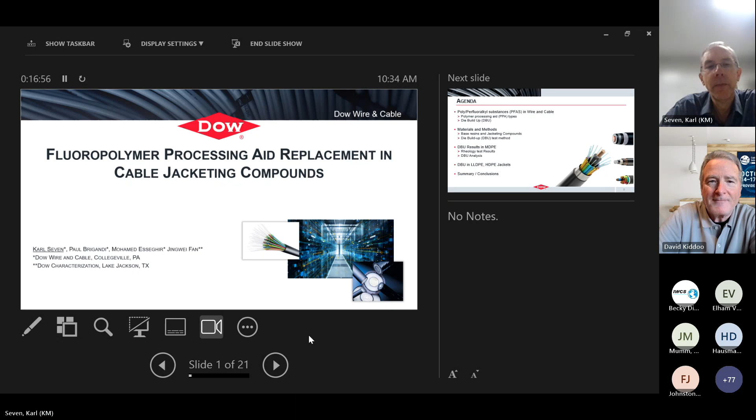Okay, can you hear me okay? Yes, absolutely. Okay, so I'll get started here.

I'm just going to describe on a high level here what I'll cover in this presentation. Basically, the first part focuses on poly and perfluoroalkyl substances, in particular in the context of fluoropolymer-based processing aids, so it's very focused on that area. I will get into what the motivation is behind why it's a good idea to avoid these types of processing aids, and what other options can be used to replace them potentially. Most of this presentation will focus on die buildup results, in particular for medium density jacketing compounds. I will branch out the results also to linear low as well as high density polyethylene jackets, and then I'll provide some of the key conclusions from this work.

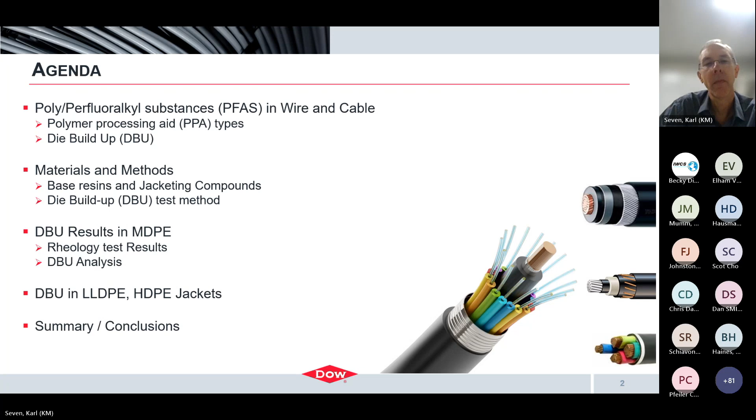Processing aids are typically used in jacketing compounds because they have the potential to provide several key benefits, including lowering extrusion pressure, improving the surface finish of the extruded product, lowering extrusion temperature, and reducing gels. They can also, of course, help to reduce melt fracture as well as die buildup. I will point out, though, that one particular processing aid does not necessarily provide all of these benefits, and so you do need to select the processing aid for the particular need or for the problem that you're looking to solve.

So really the two most common reasons why these processing aids are used in terms of jacketing compounds are to reduce melt fracture and reduce die buildup.

Melt fracture is basically flow instability that occurs within the die, and that can lead to unacceptable surface finish. As you go to higher and higher line speeds, this problem can occur more readily and become more severe, to the point where you get this unacceptable shark skin type surface. Now, melt fracture can be addressed by resin design, so it's not always solved by using processing aids.

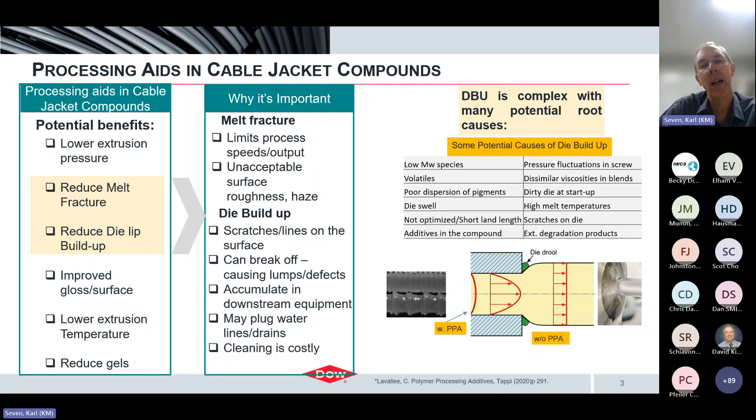So that's one mechanism that can help to avoid the die buildup, or at least help to reduce die buildup overall.

So now specifically about fluoropolymers - fluoropolymer-based processing aids is a very common way to address or reduce die lip buildup.

And in particular, of course, there are many different chemistries, but the most commonly used ones are based on fluoropolymer chemistry. These types of processing aids have many decades of proven effectiveness, but they do belong to the category of per and polyfluoroalkyl substances, or PFAS.

And I'm sure most of you are familiar with that term. This is a huge category of chemicals having a huge range of applications.

I won't get into all of those, but they're in packaging, they're in nonstick cookware, and other applications as well. They are, unfortunately, have a lot of EH&S issues associated with them.

And in terms of the fluoropolymer-based processing aid, it's really the most commonly found one is the difluoroethylene hexafluoropropene. That's probably the most common chemistry.

There are obviously different ones, and I'm sure most of you are familiar with the typical trade names for these types of processing aids.

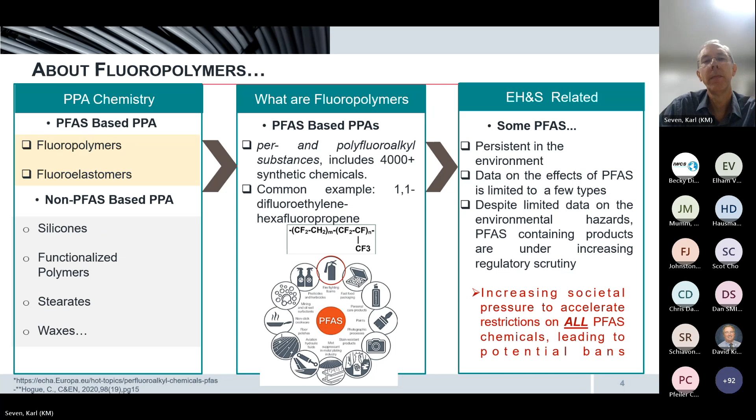So I already mentioned the potential for bans and restrictions. Here I'm going to briefly describe the materials that we used in this study.

The table on the left shows the different processing aids that were looked at. These were based on some different chemistries, but we also looked at two different typical fluoropolymer-based processing aids, which I've abbreviated as FP1 and FP2. These are pretty typical ones.

But we also looked at and compared the performance of those to some non-PFAS-based processing aids that were silicone-based, such as silicone oil, functionalized silicone oils at high and low molecular weights. We also looked at a polar polymer additive, as well as a blended system of a silicone oil with a polar polymer additive. These compounds were produced in a melt mixing process.

The table on the right has a lot of information, but basically what I'm showing here is that we mostly concentrated on medium density jacketing compounds. That's where most of the studies I'll show here are - looking at how these different processing aids perform within the medium density jacket compound. But we also expanded out to linear low as well as high density jacketing compounds.

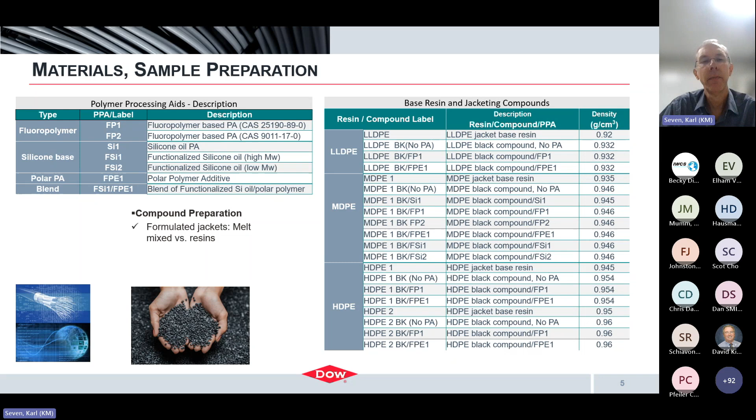Okay, so the first part of all of this work was to basically ensure that we had an effective test method to evaluate die lip buildup. So here I'm basically describing, at a high level, what this method was.

This consists of a single screw extruder with a typically relatively small die tip, 0.06, where we captured pressures as well as temperatures, and of course the die lip buildup over time. The die lip buildup is captured at set time periods up to 3 hours overall.

Also, in order to evaluate the die buildup itself, we developed a rating scale of performance, basically 1 through 5, with 1 being no buildup like I show here, versus a 5, which would be severe buildup. Throughout this test period, we also captured some other parameters, such as output rates, strand diameter, and so forth, to ultimately evaluate processing aid performance.

One other thing I'll point out here is that we did take a lot of precautions in this test. Also, in this rating system, based on multiple runs and experience and so forth, we did establish a target performance where basically a 1 or a 2 is what we're really shooting for in terms of meeting the desired performance for die buildup.

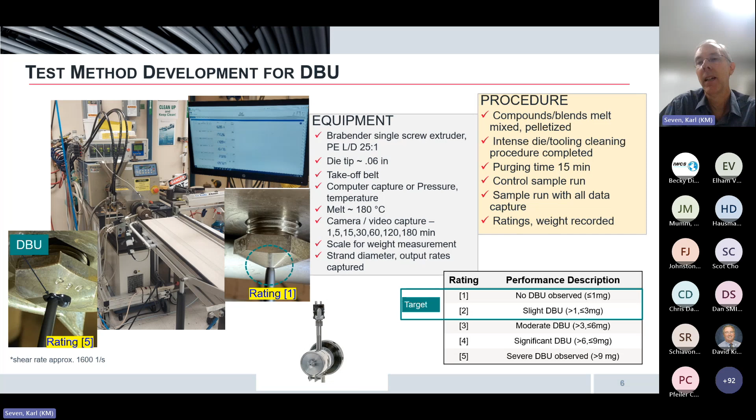So here I'm going to now focus on some of the results in terms of die lip buildup. Again, most of the focus of the study was on medium density jacketing compounds, so I'll go through some of those key results. The table here on the left captures the die buildup performance over equal time periods.

MDPE1 was a control sample or comparative sample, basically just the polymer itself. In that series of pictures, you can see that the buildup occurs quite rapidly, with the onset occurring within 5 minutes. Overall, there was quite severe buildup at 120 minutes, with a rating of 5.

MDPE1 BK is the next series of pictures I show here. That is basically a fully formulated jacket compound, but with no processing aids. The overall buildup is about equivalent to the first series of pictures, having an onset time of buildup of about 5 minutes. This basically suggests that the polymer is contributing significantly to the die buildup overall.

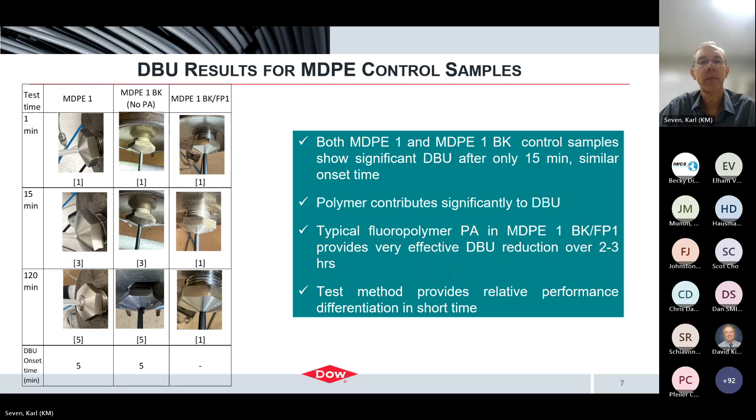Going back to what I said earlier, depending on the system, the compound itself, not all processing aids can solve or provide every benefit that is necessarily claimed.

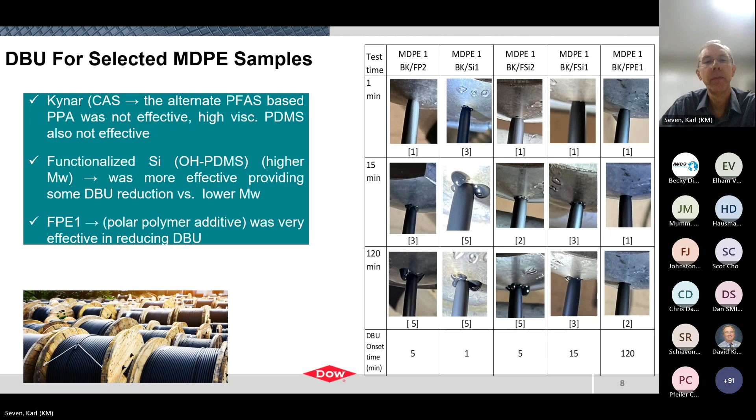Comparing the die buildup of the base resin MDPE1 to the fully formulated MDPE compound with no processing aid indicates that the additives in the fully formulated compound actually contributed to increasing the rate of buildup, either by forming or the additives themselves contributing to the buildup.

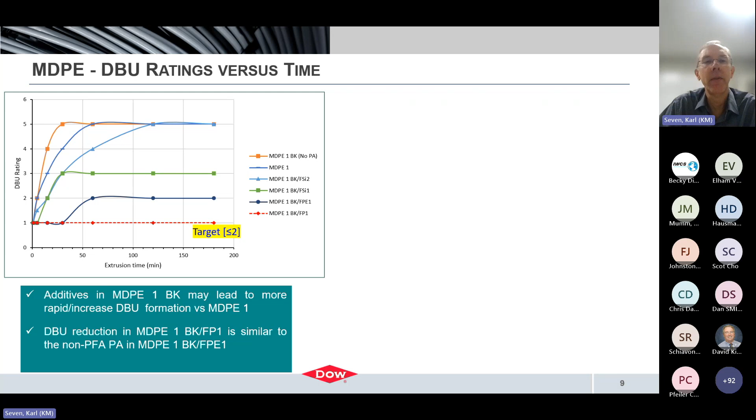One thing I'll point out is that we looked at results for the polar polymer additive, which showed good performance, at 2 different concentrations, and we saw a slight improvement in reduced die buildup at the higher concentration versus the lower concentration, showing a rating of 1 versus 2. As mentioned, the functionalized silicone did show some effectiveness, but overall was not as effective as the polar polymer additive at the same concentration.

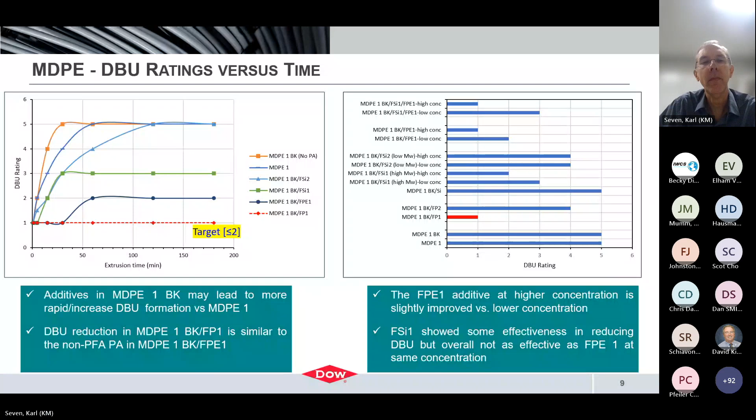These results show the typical fluoropolymer had similar pressures to the control sample MDPE BK, the sample without processing aid, and also similar to the polar polymer additive sample. These results indicate that the fluoropolymer did not significantly reduce pressures overall, but neither did the polar polymer additive.

Extrusion melt temperatures for the polar polymer additive sample were similar to the fluoropolymer-containing samples. These results indicate that processing should be similar with the polar polymer additive sample versus the comparative with the typical PFAS-based processing aid.

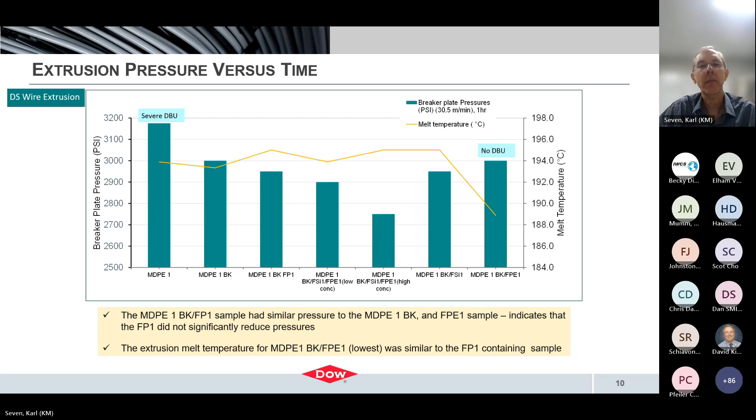The other thing we saw was that this promising polar polymer additive showed similar results to the fluoropolymer, the typical fluoropolymer-containing sample. Overall, these samples showed about equivalent jacket smoothness, so really no melt fracture issues would be expected with the modified sample using the polar polymer additive.

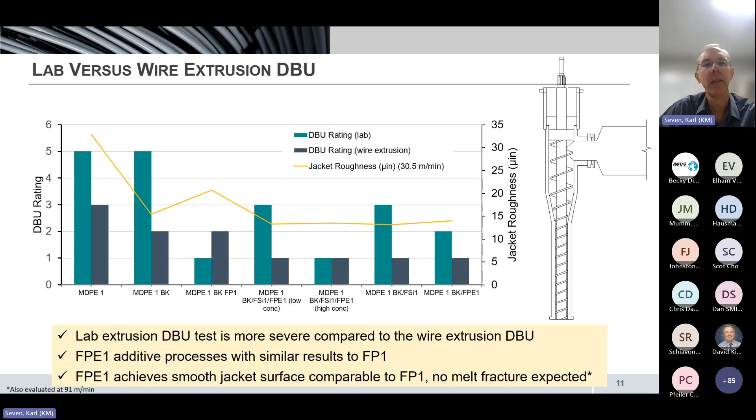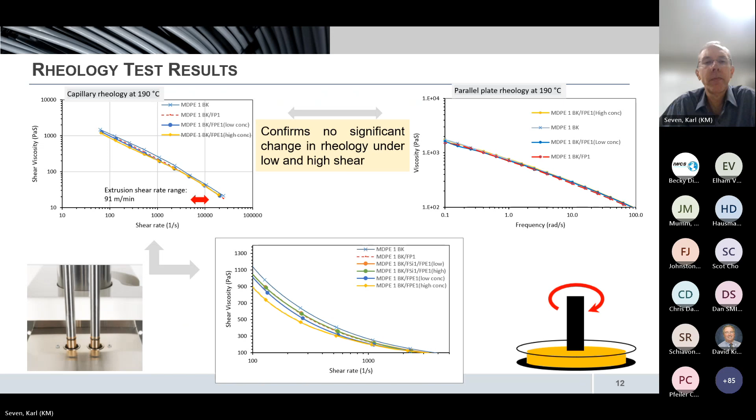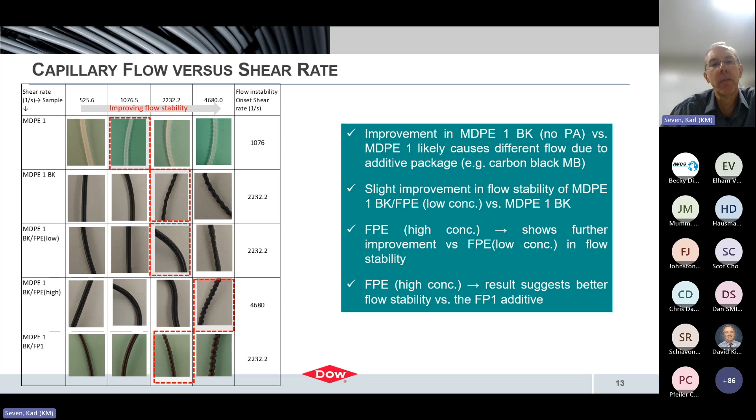Here, what we did was look at the die buildup sample itself. We wanted to get a better understanding of what was going on with the buildup. In the case where we were able to collect enough material of the buildup from the actual extrusion process, we tested it in GPC and characterized the molecular weight distribution. What we found was that comparing the buildup versus MDPE1 and MDPE1 BK, the buildup does show a relatively high amount of low molecular weight species, with a reduced PDI of 6.3.

Comparing the comonomer distribution of the buildup versus the comparative samples, those aligned, which suggests that this buildup is likely material coming from the original resin—in other words, this is not degraded buildup. The other thing I'll point out is that we did ensure our sample was not cooking or heating on the face of the die for extended periods, to avoid the effect of oxidation. There are also high molecular weight components present in the die buildup itself, and the buildup is really mostly the polymer.

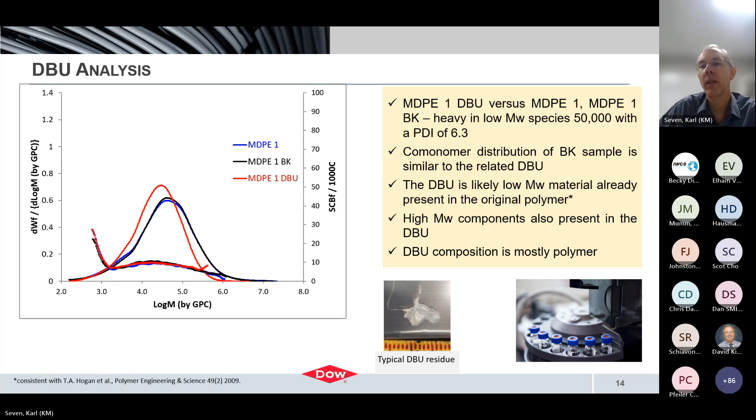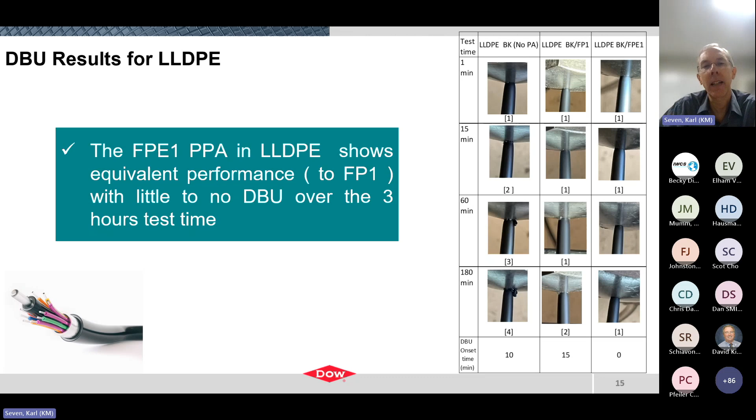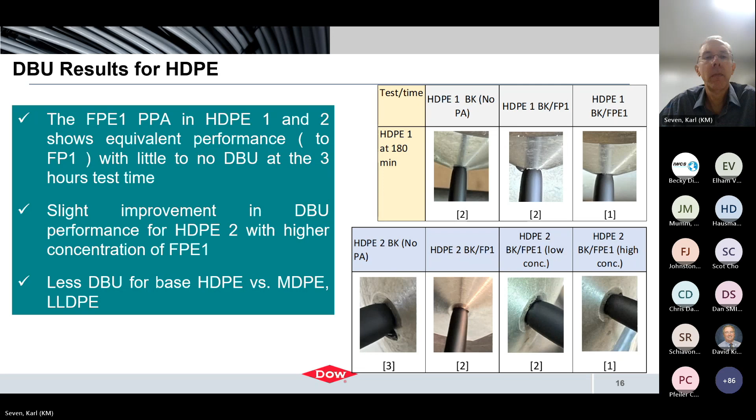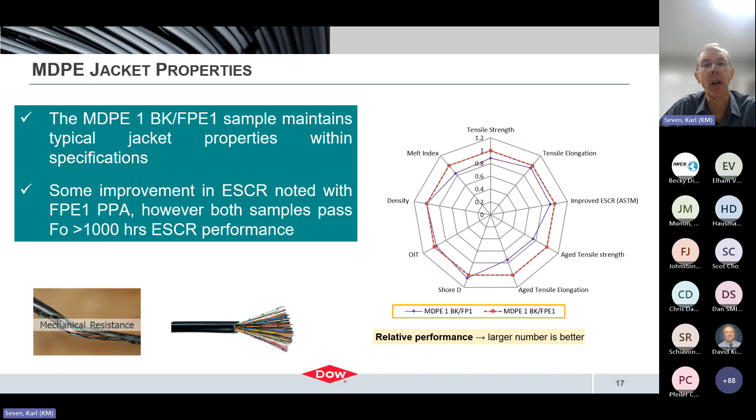In particular, the aging performance overall, and there were other properties looked at that I don't show here, electrical properties and so forth, where we were also similar overall in performance.

So I'll summarize what we conclude from this work. I think the big picture is that obviously the fluoropolymer-based processing aids perform very well, in particular for reducing die buildup. However, if you can select non-PFA-based processing aids, they will work equivalently, and in some cases perform slightly better, at least within the context of this study.

We identified one in particular that performed extremely well and compared it to the typical fluoropolymer additive. I'll highlight that these processing aids do need to be carefully selected, depending on what problem you're looking to solve.

Rheology tests showed about similar performance versus the typical fluoropolymer processing aid, and even going into full-scale wire extrusion processing, we achieved about similar processing performance at that scale as well.

We also extended this testing to linear low as well as high density jacketing compounds, and we're able to show the same benefit that we saw with medium density jacketing compounds. That's pretty much what I have here. I guess we can stop and open up to questions at this point.

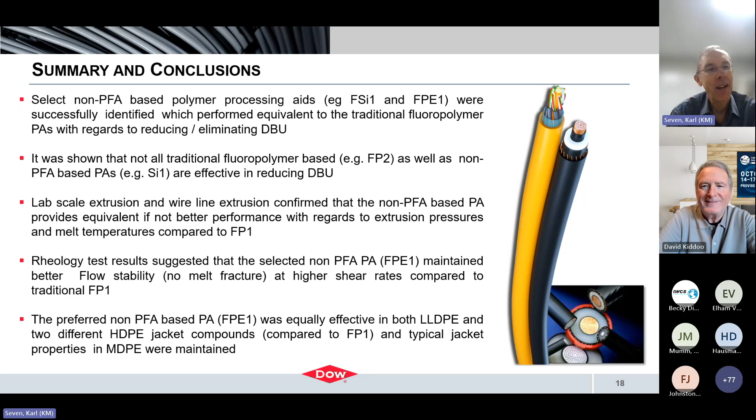Well, that is sort of another - it depends, how in depth, and it could potentially, but it may not either. Again, the levels are very low in it, so it's one of those things where if you're analyzing at the ppm level, you could potentially see the fluoropolymer. Possibly you could potentially see anything if you take it to that analytical level of ppms, low concentration - it's always possible to potentially decompose something into its basic components. So yeah, that's probably my best answer on that one. It's just going to depend on how you do the analysis, what you're looking for.